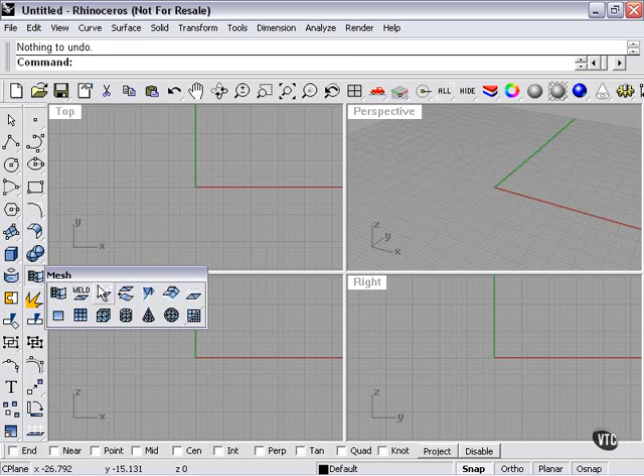Now what about saving your work? Well, to demonstrate that, let's create some quick things here.

I'm creating a mesh cylinder. These are my mesh primitives here, and mesh sphere. Creates a pretty simple two-part shape.

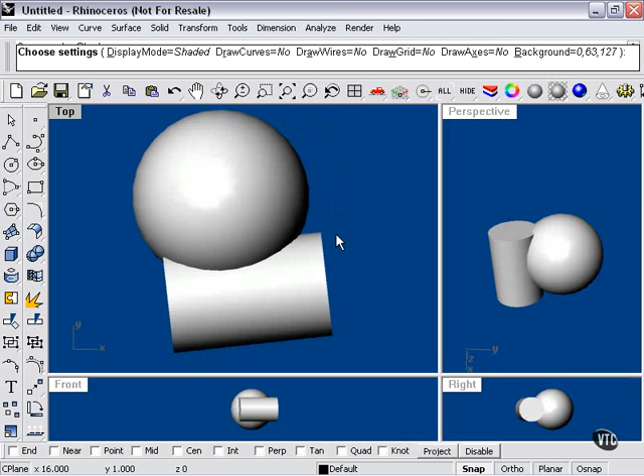Now if I'd like to save this, my Save Tool button is here. As you can see, I have Save Small, Save As or Save As Template, Incremental Save, Save or Export.

Incremental Save will allow you to save each step of a project. Save As Template, with a right-click here, will actually turn this into a new Rhino template file, which means the way that the viewports are set up when you open the new file.

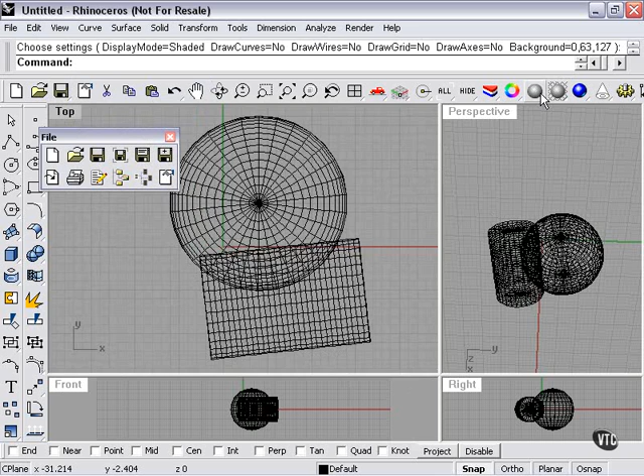Save Small will save without the polygon render information. What does that mean? Well, when I click my shaded preview, in order to show me a shaded preview at all, Rhino has to quickly generate a sort of polygon mesh preview of these objects.

Now, if this were a really complicated scene, if I had dozens of these shapes, for example, it would take it a little bit longer to show me what was going on.

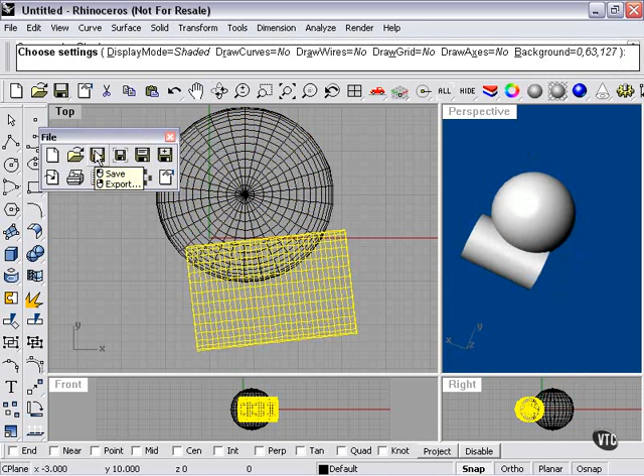Then when I save my file here, it's actually going to save all of that information as well, which means when I reopen my file and I click Shade, it would happen instantly because the render meshes have already been created. If I save Small, the file size, as indicated, would be smaller, and these preview meshes would not be saved. So they would be regenerated when you use your Shade Preview command.

Now we have other commands like Document Properties, Attach, Work Session, Working Directory, Notes, Print, Insert or Export with Origin. We don't really use these in the fundamentals of Rhino. They're not really necessary. But here is our Open command and our New command.

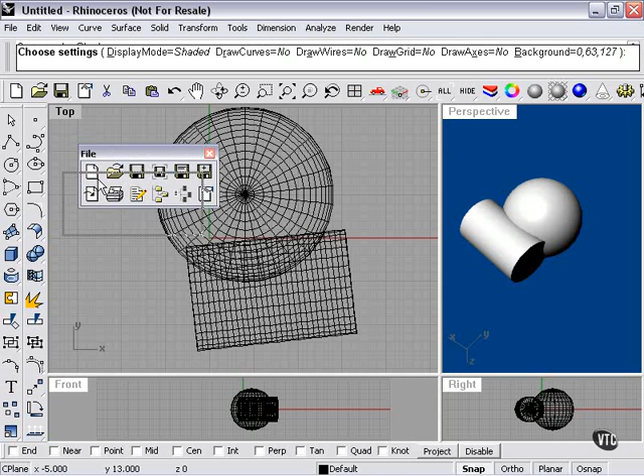So I'm going to click Save. My title by default is Untitled. My file type by default is the Rhino file type, 3DM. So I'll just type Model.

As you can see here, I can click Save Small. I can click Save Geometry Only. I'm just going to save it as normal.

Now, if I press Open, here we can see our model file. And again, if this were a different file type, it might not appear in the list. But I can always scroll here and select all file types. And then as you can see, a couple of more file types appear.

These types here are actually OBJ, wavefront OBJ files. So I'll select Model. I'll press Open. And we're back here again. So that is saving and loading in a nutshell.